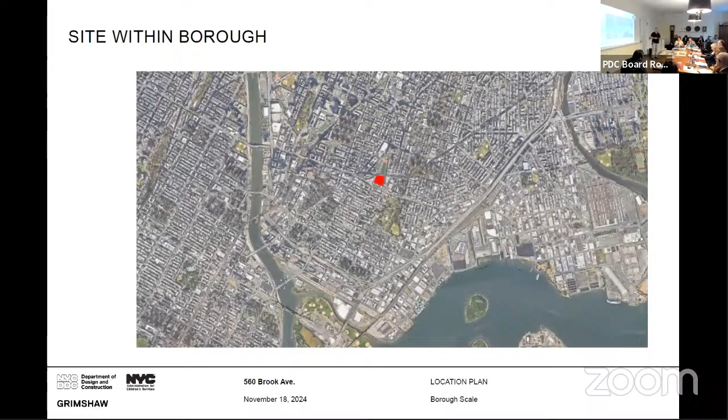I have my notes to try and skip through a lot of the slides so we get quickly to the changes since the last time we were here. You can see the site here. There will be a new entrance on Westchester, creating a construction zone in the current field with trailers, separate from the existing facility, which needs to operate 24/7 during all of the construction. The existing basketball court, shown in blue, will remain available to the youth during construction.

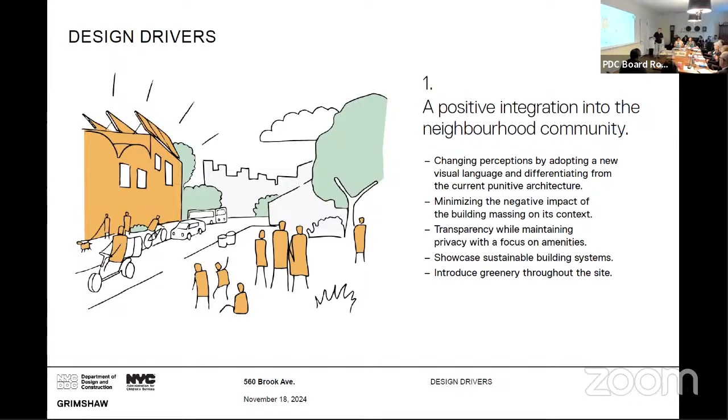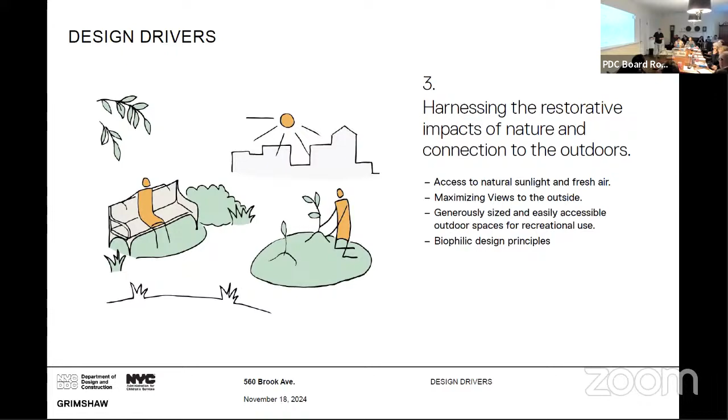The site is very land-challenged, so the program is a vertical program on a site that currently has 2 stories, and this will be a 5-story facility. You can see here, it's 4 interlinked buildings. Another feature of the land challenge is that the gaps between the buildings are quite narrow.

We have these breezeways that link the buildings so the youth, as they walk to school, get a taste of outdoors and the weather, and they're very excited about having that opportunity every day. To the south is the exercise pavilion, which has 3 stacked levels of basketball-court-size floors. The yellow is the education vocational building, and there are 2 housing halls that connect directly into their homerooms in the school building.

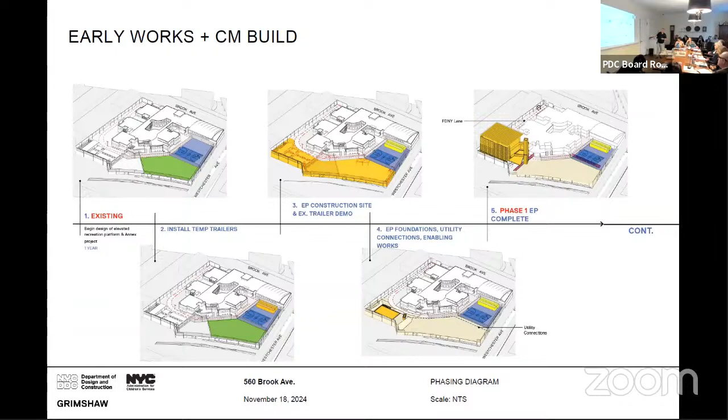In terms of phasing, we're building the exercise pavilion first, and we're hoping to start construction late this year or early next year. As I said, the existing outdoor basketball court remains available to the youth. Once the exercise pavilion is open with 3 basketball courts, the rest of the construction can continue. At the end, we create a natural turf playing field along Westchester Avenue.

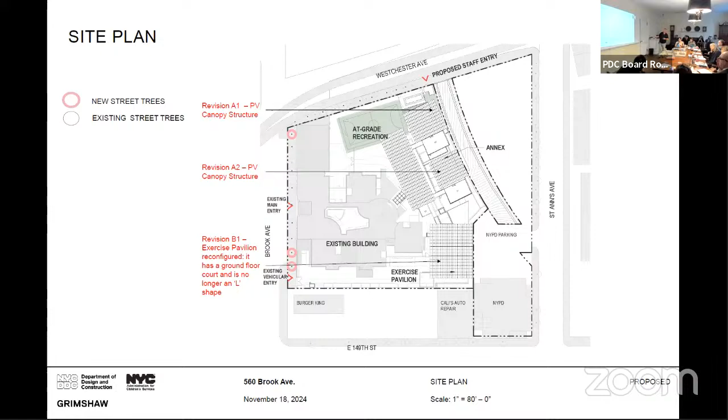We go to here, you'll see the latest roof plan. It shows the exercise pavilion with photovoltaics, the school building with photovoltaics, the 2 housing halls with photovoltaics over the mechanical, and open to the sky over the horticultural areas. Then the at-grade playing field and the new staff entrance on Westchester.

Ground floor: the staff entrance and brand new facilities, lounge and security facilities, locker rooms. They go through security. In red is the dining - there's a kitchen, back of house, and then 3 dining rooms with outdoor space, which you'll see later. And then in yellow, 2 trade workshops at ground level.

Level 2 is the health floor and also has the culinary arts facility. Then level 3, there are 3 levels that are quite similar - there's the school building and the 2 housing halls in blue, connected with breezeways. At level 3, we also connect to the second stacked level of the basketball facility in the sports pavilion.

Level 4, again school and 2 housing. Level 5, the school. And again we connect to the top floor, the roof level of the exercise pavilion.

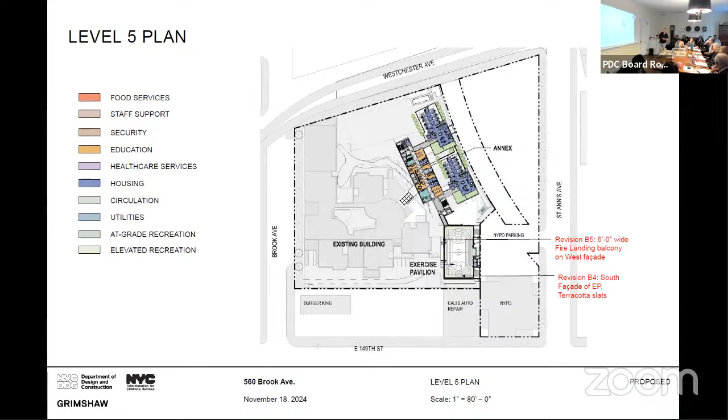I should mention I said the horticulture - 2 outdoor horticulture areas with a classroom, an indoor classroom as well.

And then if we skip past the elevations, you really see the building in the renderings.

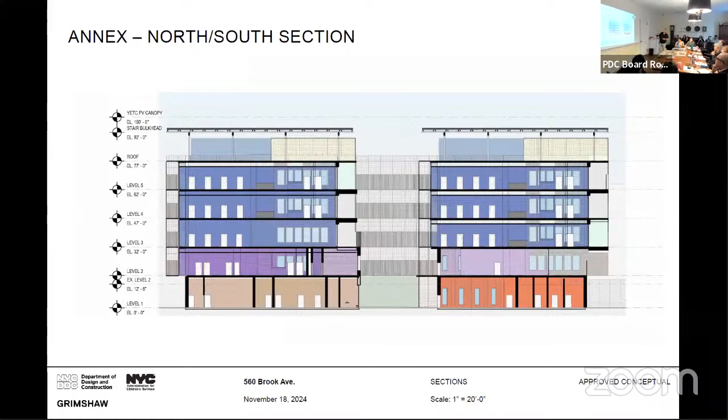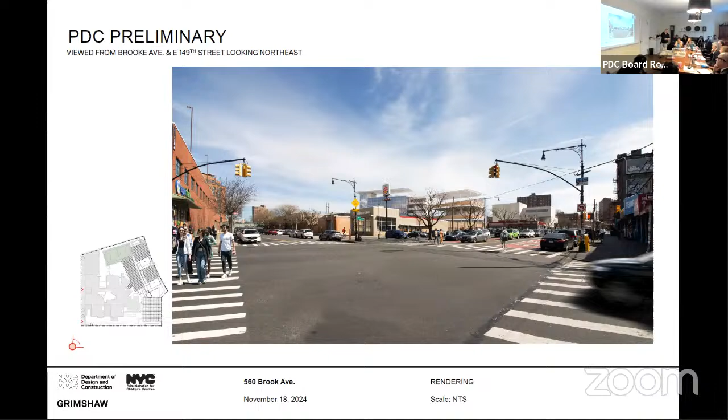So from the concept to preliminary, the view from Brook and 149th Street - the exercise pavilion has moved back in this view towards St. Anne's Avenue. You can see the lower floor is behind the perimeter wall, but then levels 2 and 3 are very open.

We're at around 50% of the energy needed in this facility will be produced on site. Another big change is we're now having terracotta slats instead of wood, so non-combustible. These allow the youth to have a regular window they can see out, and the slats allow visibility up to the sky but not down to the sidewalk, which is not allowed by law, and also for their privacy. The slats are about 10 feet in front of the bedroom window, so you'll see a rendering of that in a minute. Now I'm going to hand off to my colleague.

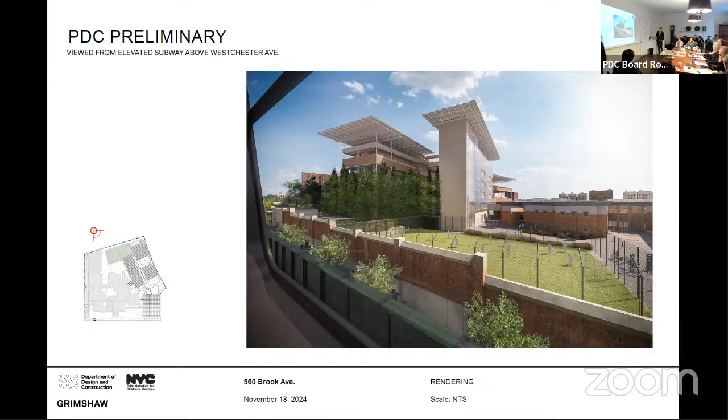I'll skip through these a little bit, but this is the basic lighting plan for the exterior, which you just saw in the image prior. Then this is the lighting scheme for the phase one exercise pavilion, and this is the outdoor basketball courts.

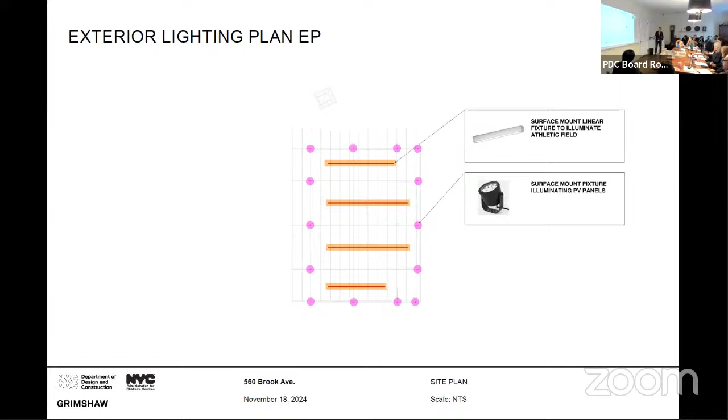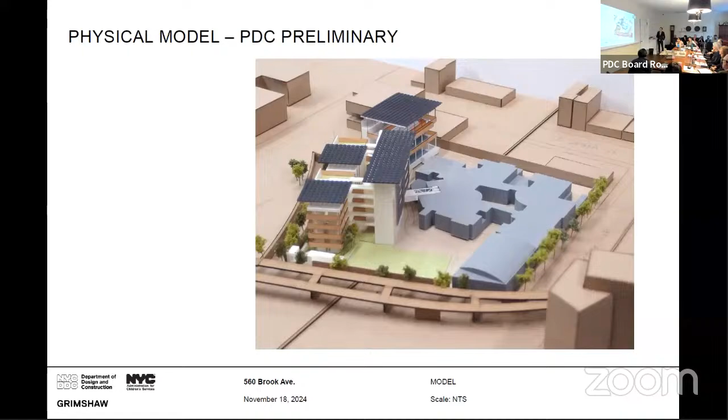So here's our model presented at the concept phase. Again, the biggest change is in the massing with the reconfiguration of this building, the exercise pavilion. You can see that it's now been shifted or rotated and moved due to some challenges with zoning, but we've made it more compact while still providing the same amount of outdoor activity space for the youth.

So the major changes on the materials are that we are moving from a wood slatted screen to terracotta baguettes. Part of the reason was for code requirements of flame spread, but also durability and maintenance concerns that the terracotta will help address.

Otherwise, as we mentioned, the building integrated photovoltaics is an item we're still looking at. This is showing an example of maybe adding a bluer or cooler tone to try to bring some of the cool tones from the adjacent precinct building. There will be metal mesh screens incorporated as part of this, as well as the PV canopy and the porcelain facade. I'm going to pass it off to Elizabeth.

Thanks. Since our last presentation, we wanted to address the concerns about the planting in the interstitial spaces, whether or not there would be sufficient insolation, really the availability of natural light, how the turf area of this recreation field would be treated, and whether there was sufficient insolation for the area we were proposing as the meadow.

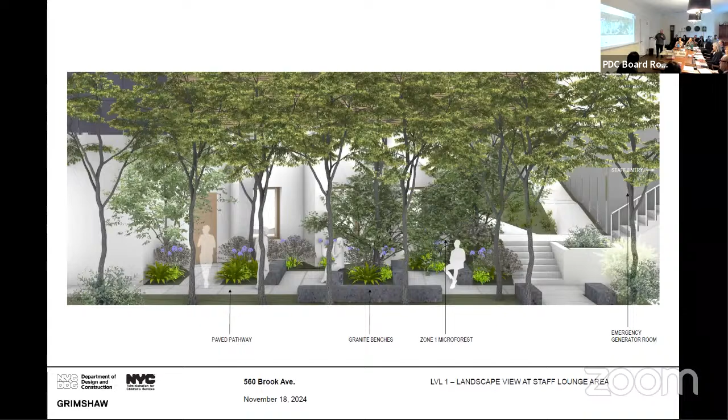Since this time, we have refined this somewhat. So where we have a deeply shaded condition, this is the suggestion of the quality of the space. This is on the eastern portion near the staff entry, the understory planting, and the staff breakout area, which the level of shade would suggest as an area of respite within the facility.

We're working on the palette for the areas of microforest, or what we're calling urban pocket foresting. We're really at this point relegating to the perimeter of the annex building because of the exposure to sunlight, and moving from trees to understory plants.

The selection includes consideration of the safety and sightlines through the site so that we're not encouraging elopement, which is one of the factors we found in other projects where if somebody has the opportunity to hide, they might. But in order to maintain the idea of diversity in the planting in these zones, even if they are quite narrow.

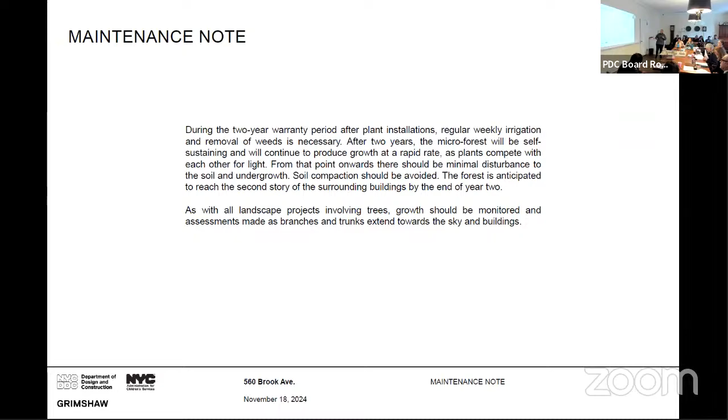As Juan and Stephen explained, the idea of porosity, visual access to the surrounding landscape, and auditory and olfactory connections are really important, plus the opportunity to incorporate education and information as part of the scheme of circulation is really important.

When we get to the roof and the terraces, the paving, the finished pattern, finished palette is pretty standard for exterior finishes, unit pavers, congruent with waterproofing and building envelope concerns. But the idea is to activate as many of the corridors as possible with the connection to nature.

And with that, examples, for instance, narrow but built-up planters with self-contained irrigation that can be manually controlled will be part of that scheme. Oh, am I going backwards? No.

Again, the idea of what those corridors could be like in terms of educational opportunities with interpretive signage, and opportunities for horticultural care.

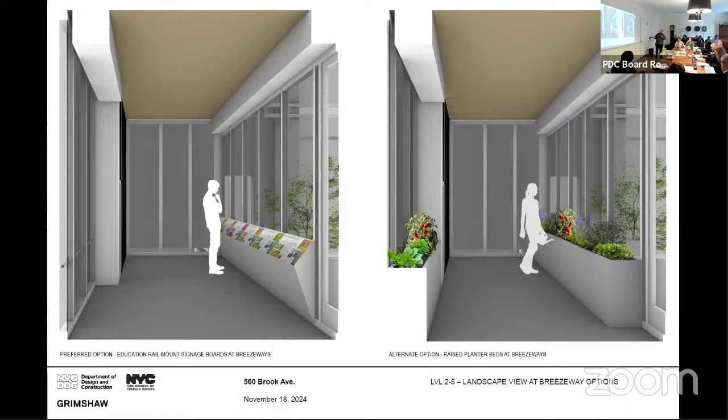In our meetings with the Hort Society, in their programming, they emphasized to us that the youth participants are really motivated and very interested in the horticultural, floricultural aspects of growing, and wanted to make sure that the programming and planning and design could accommodate those aspirations.

This has evolved since then, but we're looking at how we can efficiently lay out large planting beds that will accommodate the urban agriculture and floriculture programs in a meaningful manner, not give them short shrift in terms of scale, and the difference in how the planting palette could evolve from vegetable farming to medicinal and horticulture for ornamentation.

Again, with the interior program and the exterior program, there's the idea that anything planted at the level of the pavers would involve using compost socks. We've used this on other projects with some success, being able to limit the depth of the growing medium, which, as we know, is very granular, without having to go to a hard edge.

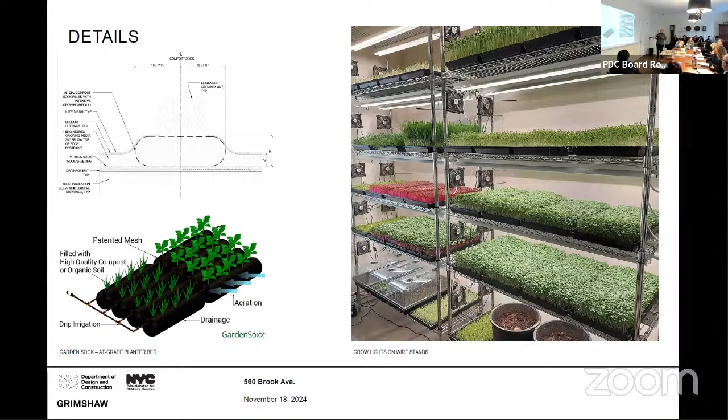And I believe this illustration is being updated, but we do have a mix of low and raised planters, in part also to ensure accessibility to all participants to the greatest extent possible.

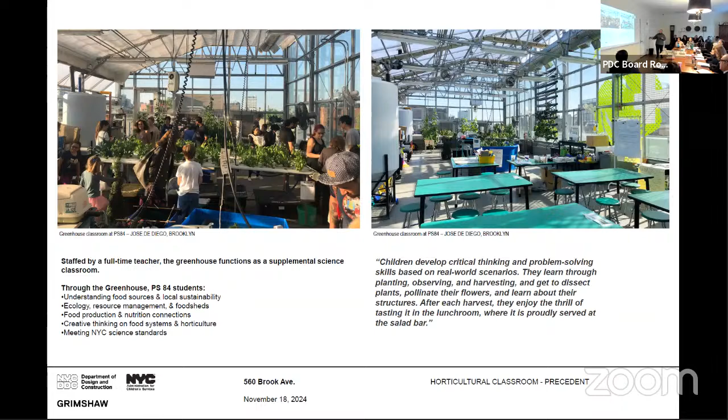Thank you so much. We will see if we have anybody signed up for... we have one more. Oh, sorry, I'll go ahead. You can try and use this one.

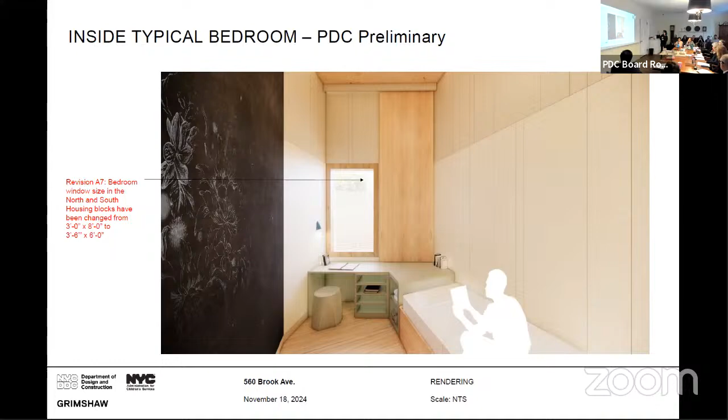Let's quickly look into the interior view update. As you see here, we create the environment for the housing unit to have a normative environment more similar to a college dormitory.

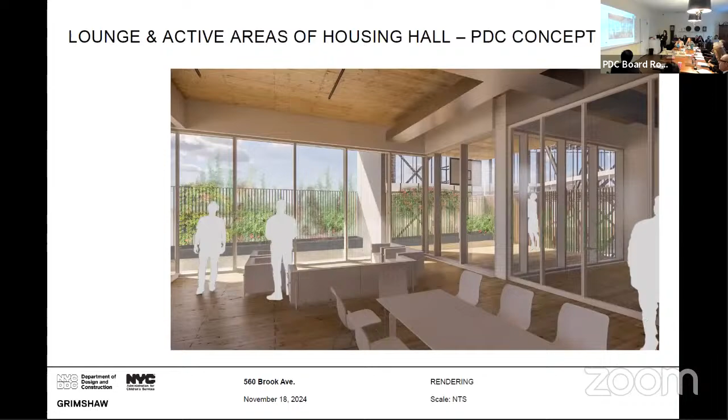We did a series of daylight studies to balance the window size and the outlook view extent, to optimize the design. This is the view from the housing lounge looking out.

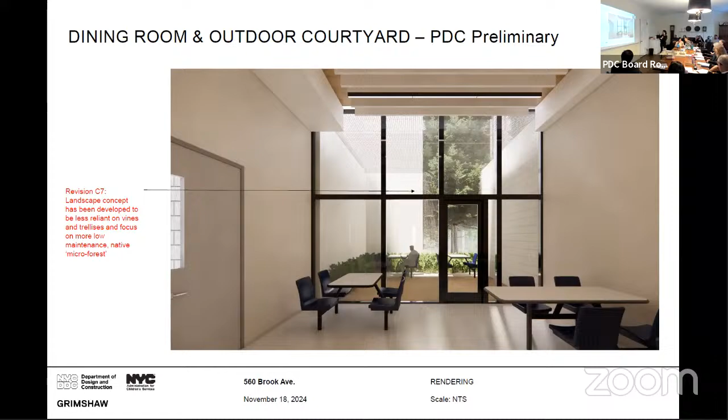We have two recreation areas for the youth for each housing unit, one active and one quiet space accessible for the youth. For the dining room, there are 3 new dining halls, each with an outdoor space plus a view to nature.

This is to see if the youth enjoy more daylight penetration. Once the annex and the outdoor sports field are built, if used, they would prefer more shade. ACS can install the remaining PV if needed.

Very quickly, we did a quick study of the view. On the model, perhaps — wondering if you can explain where this new view is. It seems like it's just a piece of it, so I was trying to understand the whole picture. This roof is the view looking at, in plan.

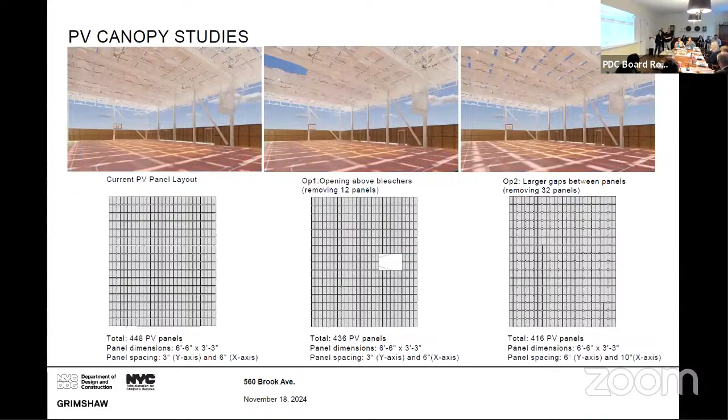So it's a PV that's hopefully being paid for by DCAS, true? So we're hoping DCAS comes to the rescue. Maybe we could hear from DCAS about the facade, the roof, and their contribution. I'm curious what you're contributing, or hopefully are contributing, which is exciting, by the way.

Right, so we are currently evaluating the proposal. We do have a mandate to install solar on public buildings, but we also have to evaluate the business side of it. As we look to install these structures, we want to maximize the amount of solar on the roof, but there are other considerations that are beneficial, not just to this facility but any facility, that we want to take into account. We haven't made a final decision yet, but typically we do fund these projects.

We have other projects with DDC that we fund. I just want to say we haven't finalized anything here yet, but we're working on it. We want to see where this goes, and then make a decision on the economics after.

So if the team doesn't have a confirmation from DCAS, will you be expecting that they plan two separate design paths based on whether they receive that support or not?

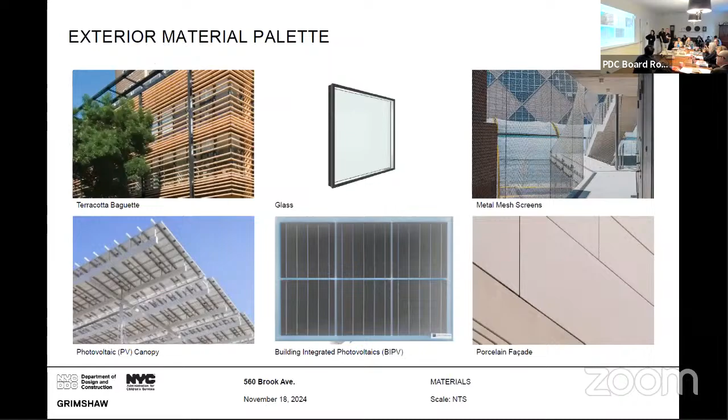Or if you go with the rendering glass, it's like that, right? Or if we go to blue, then you're matching it against those baguette elements. And if it's blue, it's more about the sky and reflecting the sky.

I'll leave it to you because this is a process. If you get the money, you're then going to keep working on it, and you'll be looking at these materials together with the new samples you get, and I'd love to see them. We'd love to, because it's very exciting to have DCAS as a partner on a big project like this.

We just want daylight. We're also interested in the benefits of the PVs. And I think Stephen mentioned we were taking some of the cues from the precinct next to us and the kind of coloring that they have. So that's where the blue came from, and the sky.

I guess that's it for me.

There were some images in the landscape architecture with interpretive signage, and I just thought more interactive or participatory approaches would be a lot more interesting than the more straightforward ones.

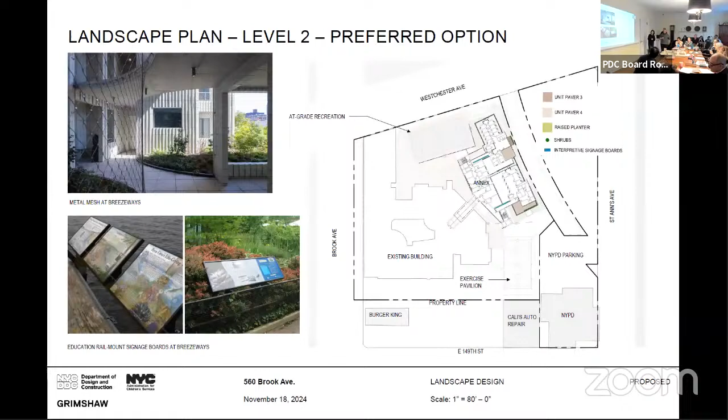There was another photo where there are planters next to the windows. I think this one on the right is a lot more interesting and probably more appealing to the population. So I see how the one on the left is easier to do, but...

When we were talking to ACS, there was also an interest in making the interpretive signage, which is not our specialty at this time, more interactive. So there was internal discussion as to whether that could be, I don't have the technical terms, so I'll say tablet driven, for instance, with touch screens.

Things that people could do to engage more with what they were seeing. I think that's potentially interesting, or it doesn't even have to be screen-based necessarily, maybe this block of text is separated and integrated with the planting in some way, or almost more like a nursery, with labels and things like that.

Elizabeth, can you speak a little bit about the width of the microforest areas? They're narrow, yeah. In some instances, they average about 10 to 12 feet.

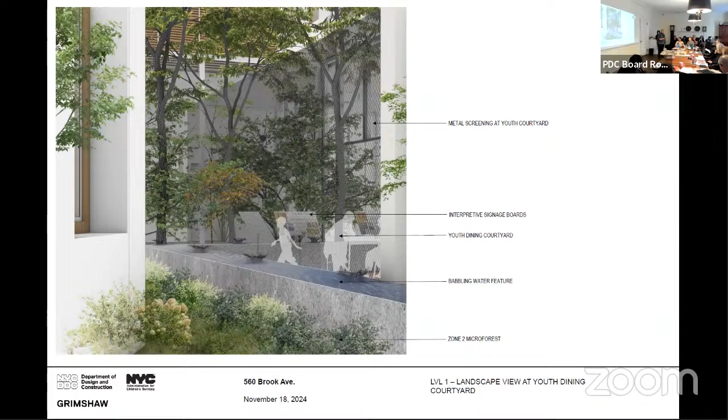Okay, and the plant palette—if the microforest palette, because it's a beautiful, very ambitious plant palette, it's too beautiful in my opinion. Yes, I kind of agree. I would be shocked and amazed if most of these things survive. So what's the plan when they don't?

Well, okay—I'm trying not to sound glib, that's why I'm hesitating. 4 years of care is really a larger commitment than is typical, for sure, first of all.

We understand that academically the original Miyawaki forest started in almost like a quarter acre to get that level of establishment. But I go back to my experience working on highways, where we're not calling them microforests, but we're planting as densely at all different levels to restore highway verges where New York State DOT has narrowed the landscape opportunity over time. We've seen those landscapes, when cared for, even in their narrowness, are really beautiful in those instances where they still exist. So I hate to say we're stepping out on faith, because this is a big commitment.

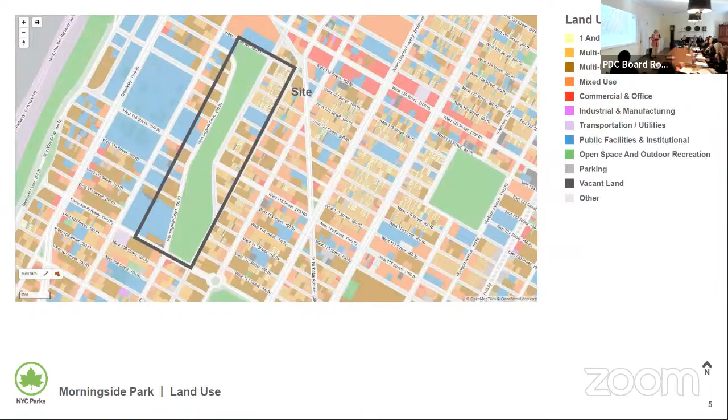Morningside Park is located in Upper Manhattan with a change of elevation of nearly 90 feet. We get heavy rains causing flooding on the eastern lower edge. We have dense residential use to the east, lower part of the park, and mainly institutional to the west. This 12-block long park serves a large population and area. This project addresses unsafe stairs and water runoff in three locations, A, B, and C. We have also added some work at the 116th Street Upper Plaza. I'll go through each of these areas individually.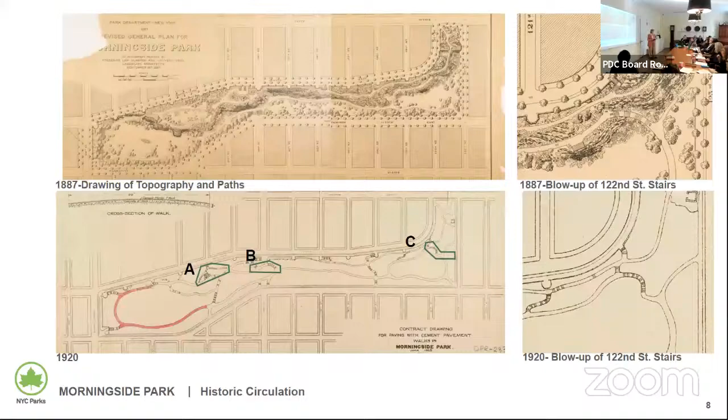These three sets of stairs each have their own story, although they all began as part of the Olmsted and Vaux 1887 design. Starting in the south, the southernmost stairs in this project are the gentle Y-shaped stairs at 114th Street. They're very dilapidated, with misaligned bluestone treads, asphalt landings in poor condition, and no handrails. The sides are lined with irregular carved boulders typical of Morningside Park and a rustic cheek wall. Our reconstruction will remove the existing treads and boulders, stockpile them, construct a new concrete foundation, then reset the boulders and existing bluestone treads and provide Landmarks gray concrete landings.

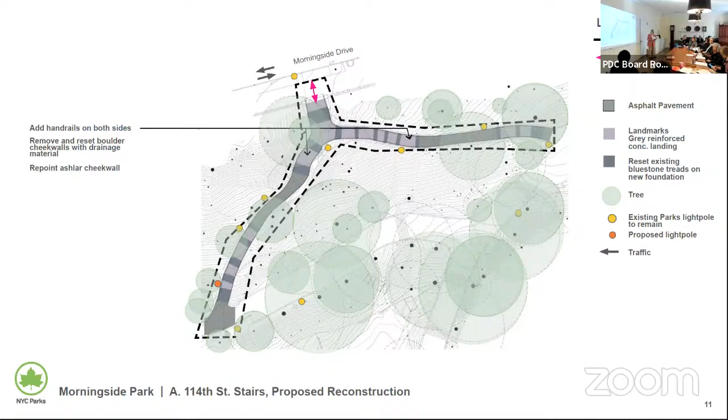If the treads aren't in good enough condition for reuse, we'll replace them with materials that match as closely as possible. We'll also add a park security light in this area, and we're adding handrails on both sides of these stairs.

The second set of stairs, the mid stairs at 116th Street, are very different in character. They're wider since they connect to the grand granite staircase.

The 116th Street Plaza, due to the constant flow of water from a protruding underground pipe in this area and slopes above, has treads that have been displaced from their foundation steps. Also, stormwater flows down onto the street instead of into the park's internal drainage system.

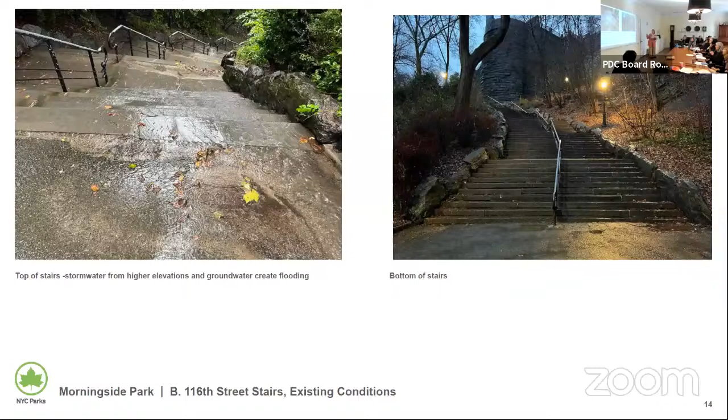You can see during a heavy storm we get a lot of water coming down these steps. We also have non-ADA compliant handrails and boulder cheek walls on the steps.

Our reconstruction will remove the existing treads and boulders from the existing concrete foundation, stockpile them, and then reset the boulders and bluestone treads. We'll pin them to the existing foundation, add drainage material, and provide landmarks gray concrete landings.

If the treads are not in good enough condition for reuse, we'll replace them. The Grand Steps and Plaza at 116th Street are well-traveled and used for public events, so security and lighting is a great concern here. We're adding several new park security lights in this area too.

We'll reset materials on the upper plaza area, and we'll be adding handrails on the center and sides of these steps.

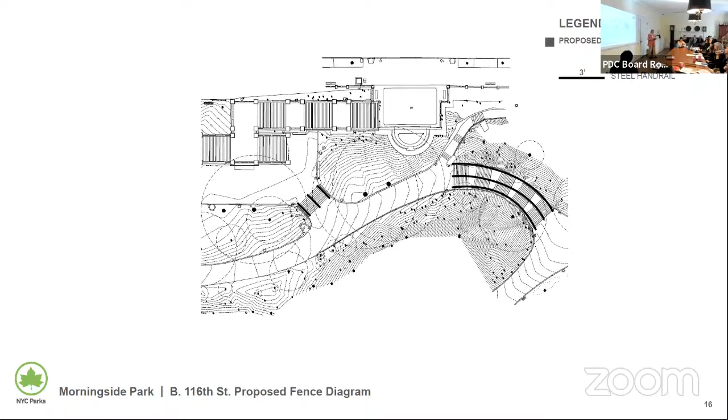The third set of steps at 122nd Street, again, are a completely different character. They were built later and have granite block cheek walls, and the treads are also very dilapidated.

As in 114th Street, we'll remove the existing treads, stockpile them, and construct a new concrete foundation, then reset the existing bluestone treads and provide landmarks gray concrete landings. If the treads aren't in good enough condition, we'll replace them.

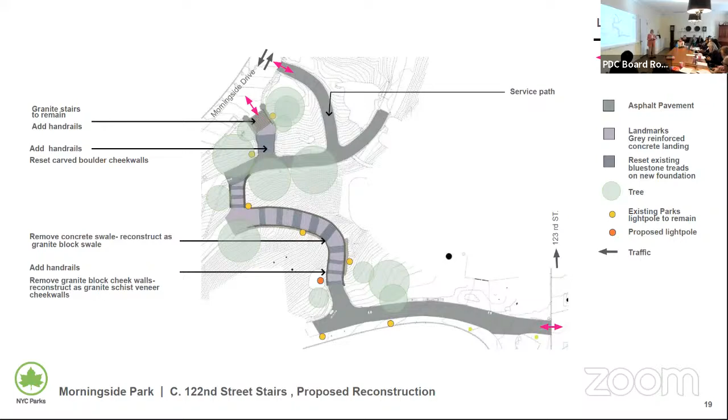We'll also reconstruct the cheek walls, and we'll be putting handrails on both sides of the steps.

The existing deteriorating cheek walls are built of granite block and have a step-down character. They have no coping to keep water out of the masonry joints. The historic intent of the early cheek walls and paths in Morningside Park was to place built structures and pathways so they're visually unobtrusive and recede into the natural landscape.

Our reconstructed cheek walls will follow the slope of the landscape too. We'll reconstruct the walls and stairs in the same footprint with the same historic granite blocks on a concrete core, using the existing joint pattern. We'll also use rustic granite coping to protect the masonry joints.

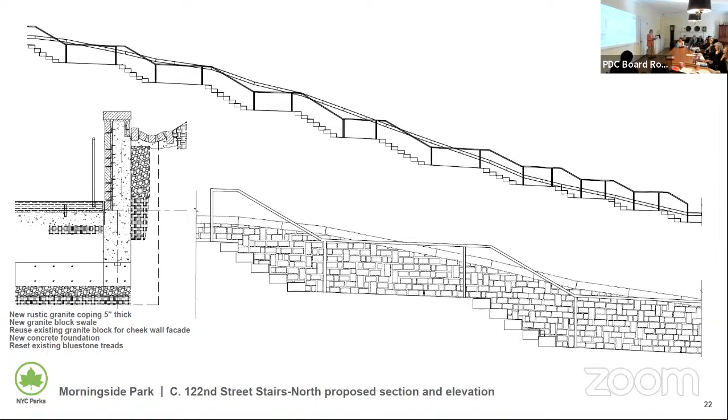Because of the existing slope and elevation, the north and south cheek walls will be very different. This is an elevation of the north side of the steps and the cheek wall, which must retain over 4 feet of soil in certain areas. And an elevation of the south side of the stairs, where the existing grade actually drops below the steps in a few places.

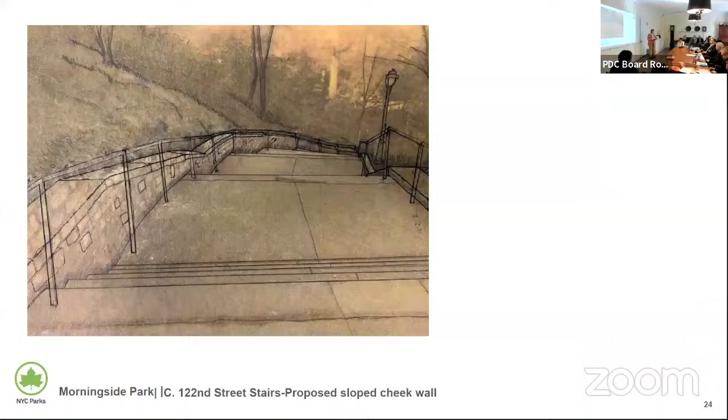This is what it would look like descending the stairs with handrails on both sides for safe accessibility, and this is what it would look like ascending the stairs.

These are the proposed site materials. We'll reconstruct the swales with granite block. The handrail is the same as the handrail previously approved for the stairs at 113th Street in Morningside Park.

We'll direct stormwater runoff into the park's internal drainage system using a variety of approaches, including new underground drain infrastructure and the new granite swale at 122nd Street shown earlier.

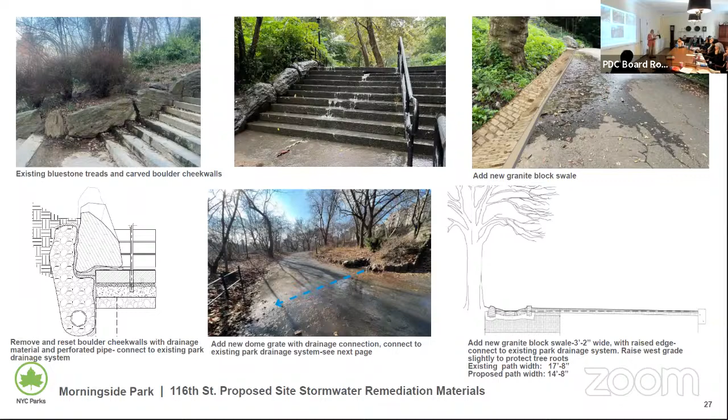Near the 116th Street mid stairs, the exposed pipe creates a bird bath area, which is a favorite place for dogs to drink and birds to bathe. We'll reconstruct the bird bath with a dome grate so it won't flood, and maintain its scenic character with mortared granite.

In 1939, the plaza at 116th Street and Morningside Drive looked like this; however, it looks like this now on the north side. We'll address the leaning pedestal and light pole, and we'll also reset the coping handrail and remove vegetation that is damaging the retaining wall coping at this location.

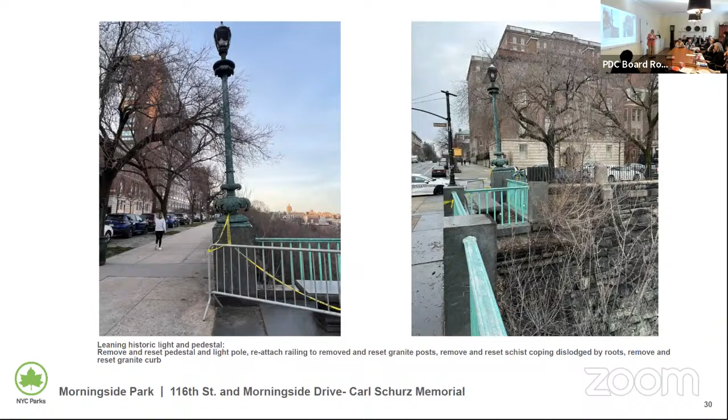So back to the big picture for your questions and comments. Thank you.

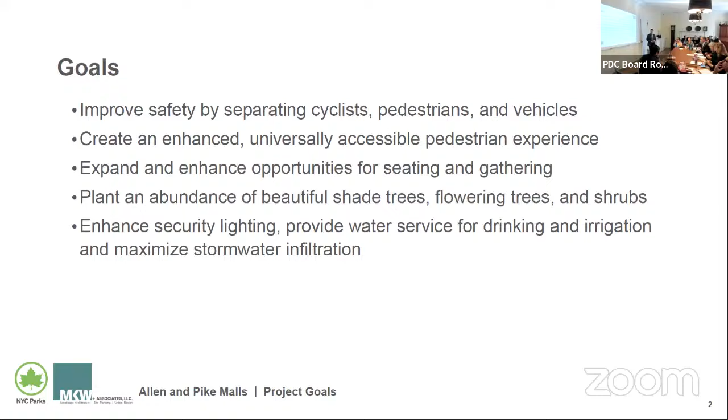We're focused a lot on improving safety, improving accessibility, making the malls more comfortable, and adding lots of new trees to add shade and comfort. The project location is in Manhattan, in the Lower East Side. You can see here, it's a very long, narrow, linear site in the center of the street.

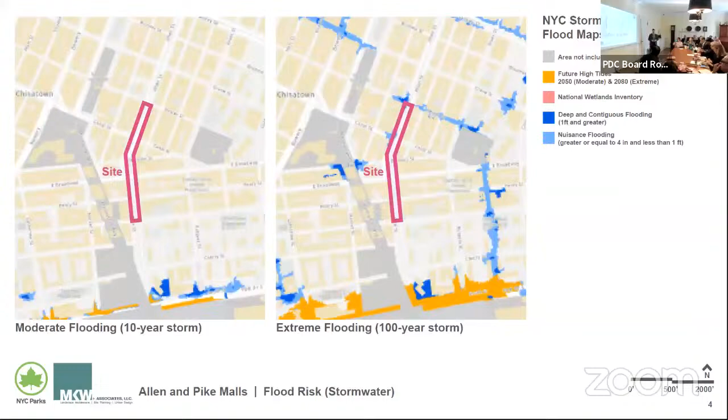In terms of flooding, during large rain events, we sometimes see some flooding on the west side of the street in these corners. We will be addressing that through increasing pervious surface and drain cleaning, and improving and reconstructing some of the catch basins. Surrounding land use, it's a very mixed use neighborhood. We've got some parks and some public facilities in the area.

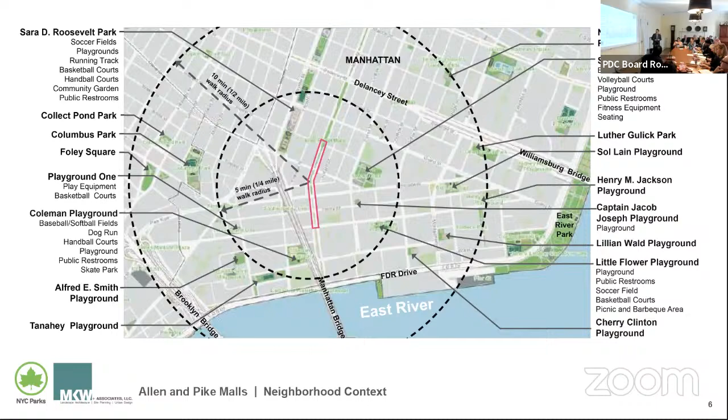Neighborhood context, so we have many parks. Our park in particular is a long connector open space that connects malls to the north and to the south down to the waterfront.

Getting into existing conditions, we're going to look at the site in thirds. You can see here on the key plan this pink area is the project that we're working on now, which is phase 2. Phase 1, highlighted in orange, was constructed about a decade ago.

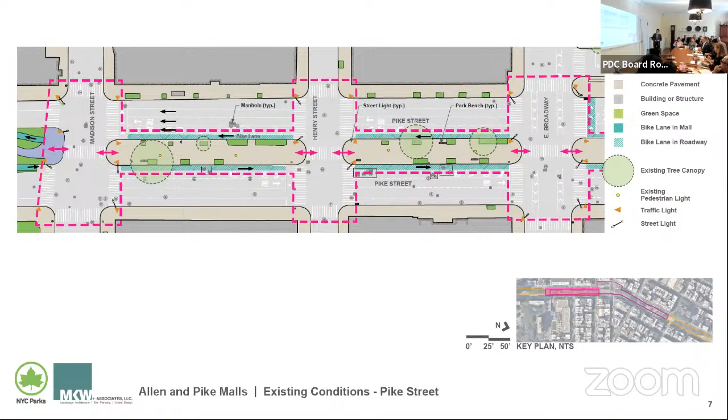This first slide is looking from Madison to East Broadway. We're looking at lots of paved areas, bike lanes that are in the street, and a patchy canopy. We've got some mature canopy trees here, some areas where there's no canopy at all.

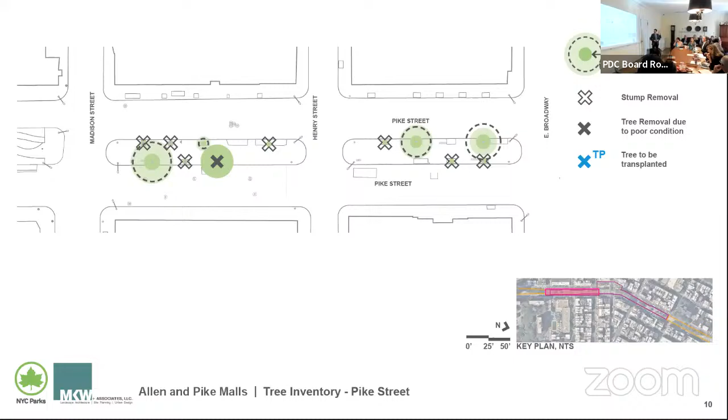Tree inventory: we're removing many stumps and a couple conditional removal trees. There's some areas where we're going to be transplanting, and otherwise we're going to be protecting and supporting all of the existing trees.

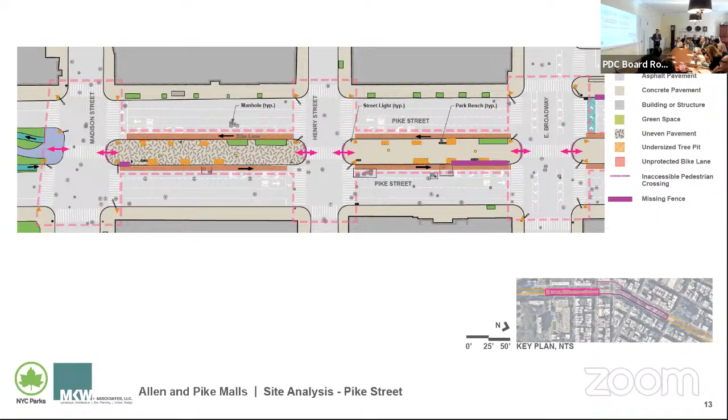Site analysis, some key points here: uneven pavement and inaccessible transitions between the malls. We have lots of undersized tree pits and a bit of a patchwork of fencing that we plan to address on our project. Looking at some site photos.

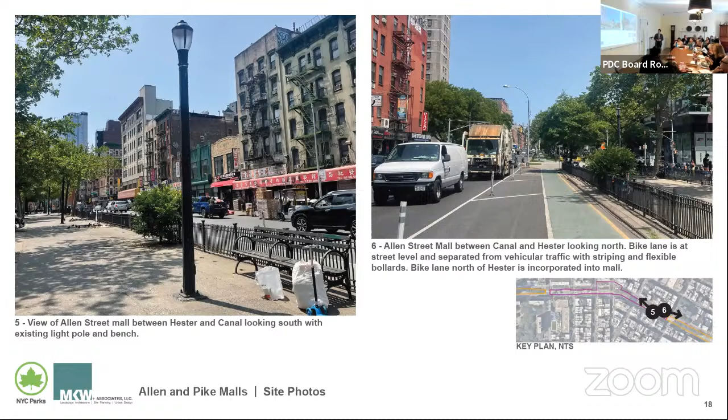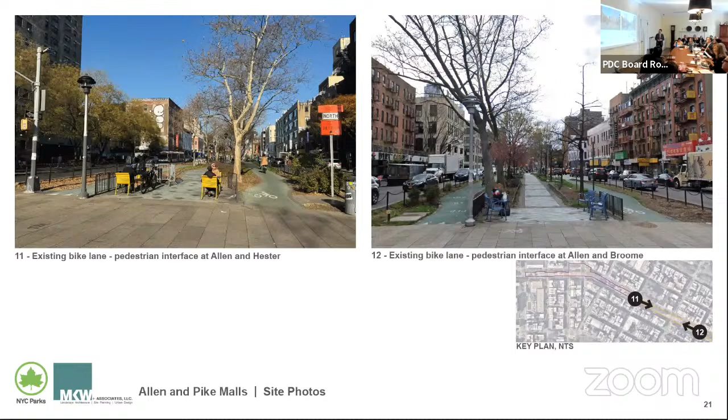And then looking to bike lane transitions, these are just some photos of bike lanes in the phase 1 project that has already been constructed. Here you can see where the bike lanes intersect with pedestrian areas. They do a bit of this jog that's for traffic calming.

We met with the community several times to hear about their goals and priorities for the project. We had a community input meeting, met with the community board a few times, and also spoke with volunteer gardeners who maintain some of the gardens in phase 1 to the north of our site.

Now showing how our site fits into the greater city bike network. Our site is here in orange. So we know that we need to connect to various bike lanes.

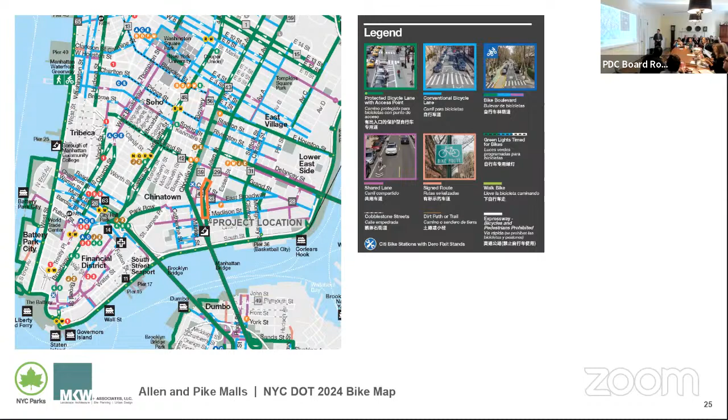Looking at circulation context, the pink is our site, orange is phase 1 to the south and to the north. What you'll see here is throughout, there's pedestrian walkways in the center. And we've got a mixture of bike lane types, going from phase 1, where they're all protected in the solid line, and now in phase 2, the existing condition, where they're not protected.

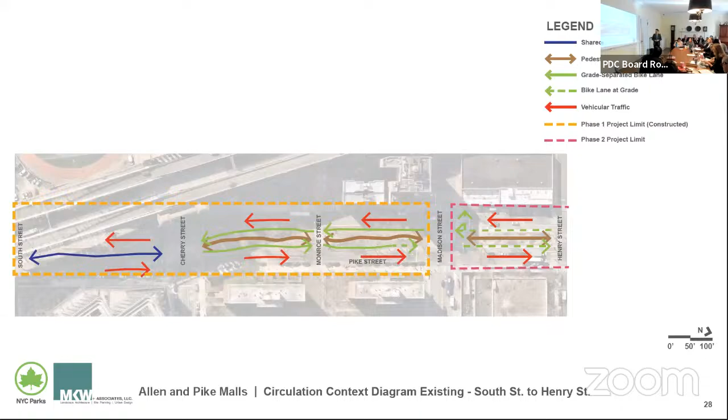Our proposed plan is to make all of the bike lanes protected. Here you can see that in a little bit more detail, where they're protected in phase 1 versus where they're currently not protected in phase 2, and how we plan to address that. Again, in phase 1 to the north.

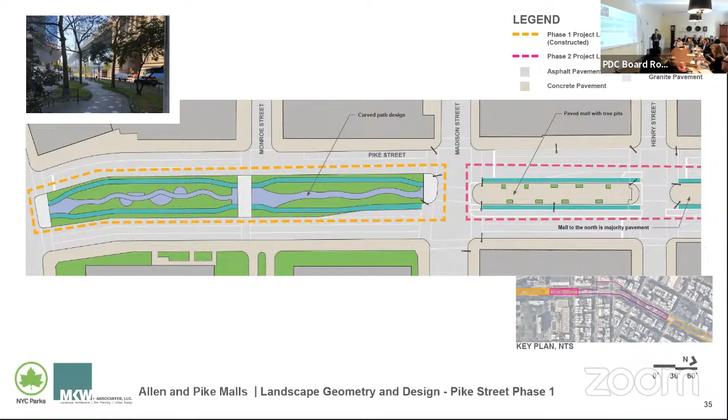Looking at the landscape geometry, we know that the walkway should relate between phase 2 and phase 1. In phase 1, we've got this curvilinear walkway to the south, and then to the north, it's more of an angled geometry. So we feel it's important to connect to those two geometries and bridge them in our project.

Now looking at design, from Madison Street up to East Broadway. You can see here on the key plan, we've got this curvilinear central walkway. The Henry Street intersection, we are proposing pedestrianizing, and we've studied that with DOT. We have long continuous planting beds with many shade trees and ornamental trees, accommodating the existing trees.

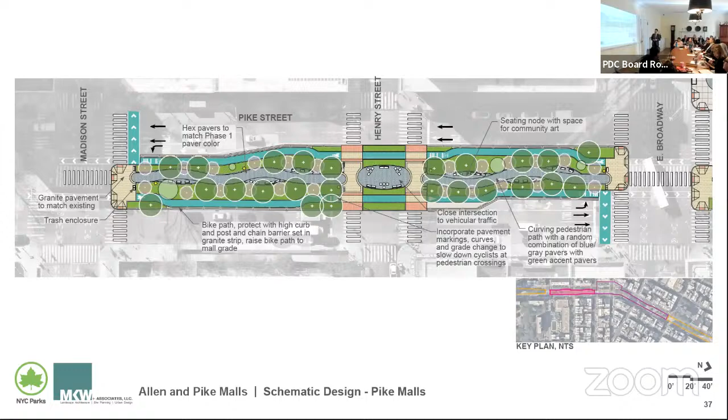Here you can see a little bit more closely furnishing nodes for seating that we've carved out. You can also see the comparison in the dashed red line, that's the existing curbs, so you can see how much more of the street we're giving to pedestrians and cyclists. This is all based on recommendations from DOT, and it reflects a lot of their striping out there now, but making it more of a paved, hardcore paved, protected situation.

Looking at the Henry Street pedestrianization more closely, we know that crossings between the bike lanes and pedestrians is very important. So we're using tactile surface and these kind of curves in the bike lanes to really create calming and notice for people when they're crossing those two different intersections.

We've got a number of furnishings that we've laid out. We're still studying the exact layout of these furnishings. I know there was a question about the bike racks, so we're going to study this layout and make sure that there's no conflicts between pedestrians and cyclists. We also have these kind of semicircle welcome mats, as we're calling them, to welcome people into the space.

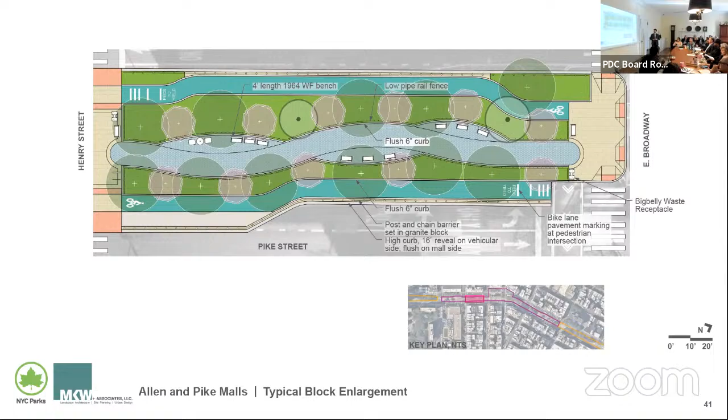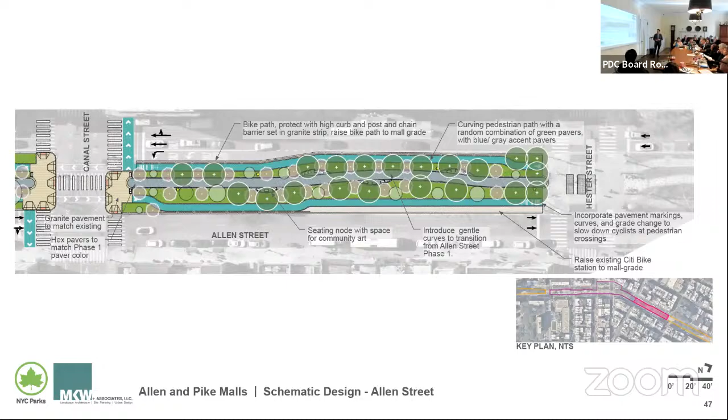Jumping to the north here between Canal and Hester, there's a very gentle walkway connecting to that angled design from phase 1. Here you can see how we've bumped it out. Looking at planting, we're using largely native plants throughout. All of these swaths will be single species swaths, and we're looking at seasonal interest and durability. We also know this is a rat mitigation zone, so we've kept that in mind.

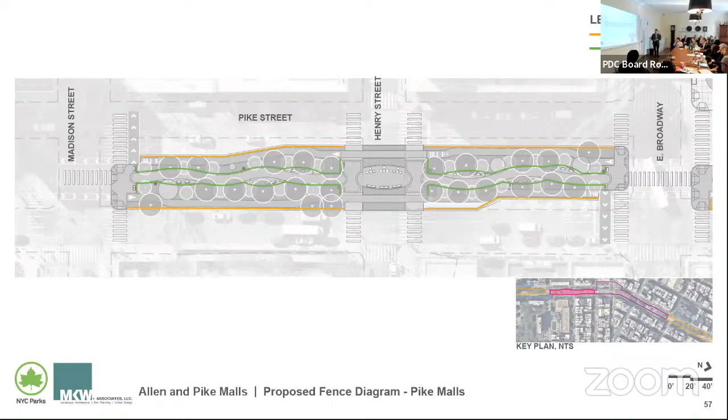Fencing—there's a mix of fences. We plan to use low pipe rail to delineate pedestrian areas from garden beds, and post and chain fencing to protect the bike lanes.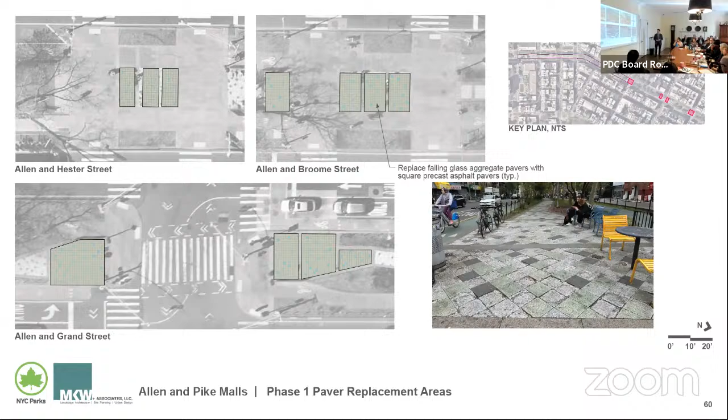We're also planning to replace some pavers in phase 1 areas. These are areas where the pavers have failed, and we will replace them with a different style paver that will be more durable, but in similar colors to connect. Here you can see the different furnishings we're using. And then for sustainability, it's a lot of pavement right now, and we plan to make it much more pervious.

All right, that's what we have for you. Thank you.

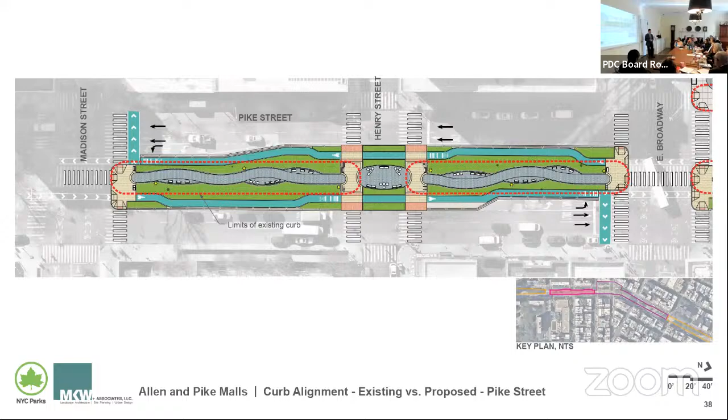And then in the north section, again we have lots of existing trees we're trying to work around, and we're also trying to transition into a more angled design up here. So we do these broad curves to try to make it relate, so that if you're walking from the north section all the way down to South Street, it feels like a continuous experience and a continuous thought.

I think overall it reads very random. When you flip through the slides and look for your existing trees, I find areas that actually don't seem to have a lot of existing trees and could potentially allow for a more balanced layout of these benches. So I would ask you to look at it more carefully, and maybe when you come back, do a plan that shows your tree protection zone against the bench nooks and against the pavements, so we can fully understand it. Because here you do have a lot, but on some of the previous slides, I don't see that many trees.

I would like to find opportunities to calibrate this a little bit more. It doesn't feel like there's a lot of calibration. Yes, we need to tie to the rest of the mall, but the rest of the mall was built more than 10 years ago. So with new materials, new planting, and the site expansion, I don't see that there's that much need for a relationship, as opposed to making sure this experience is great for the neighborhood. Chinatown, a lot of people use the outdoors. What are we thinking happens in these sitting nooks, and how are we providing opportunities for different types of social moments?

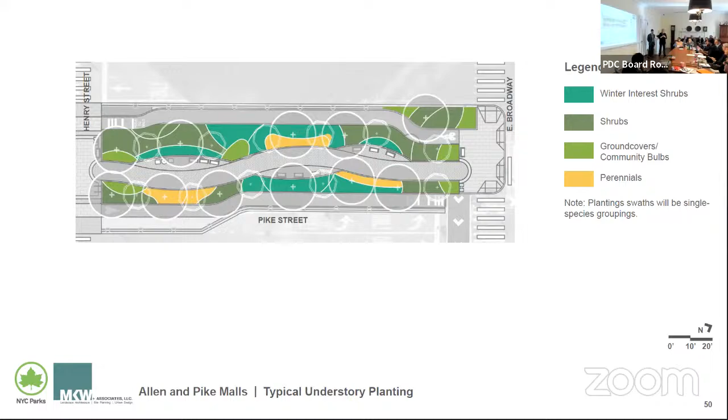Okay, I want to say I really appreciate the greening of this particular project in this area. But the thing I have most question about is where the bikes intersect with pedestrians, because there's obviously a big problem with bigger vehicles hitting littler vehicles. I've had so many friends incapacitated by bicycles that I'm really concerned about the areas with crosswalks. I think it's very effective where you have the jog just before the divot, so they have to slow down before they hit. Where it doesn't do that, I'm concerned people will be hit by bikes, kids, people who just aren't really anticipating that they're going to be in traffic. And the bike traffic is serious traffic going 25 miles an hour.

So, DOT, we've been working with DOT and we will continue to do that, state of the art safety. And Commissioner, I really appreciate it. I think one of the things that we benefit from here is we have 10 years worth of data on how this has performed so far in the previous phases, and it's proven very successful. We haven't had any accidents on the earlier phases of the mall. The one that did happen was actually in the street, and it was with a moped, not on the mall. So from a data perspective, we're excited about that.

At the same time, DOT is still pushing on new standards for especially these kinds of spaces where bikes and peds are interacting at crosswalks. We'll be coming, hopefully in the coming months, with some updated standards, especially around delineation for those who have low vision or no vision. This is something we're really keyed into, and we'll continue to work with the Parks Department on this project and a number of others that you'll be seeing. But I appreciate the concern, for sure.

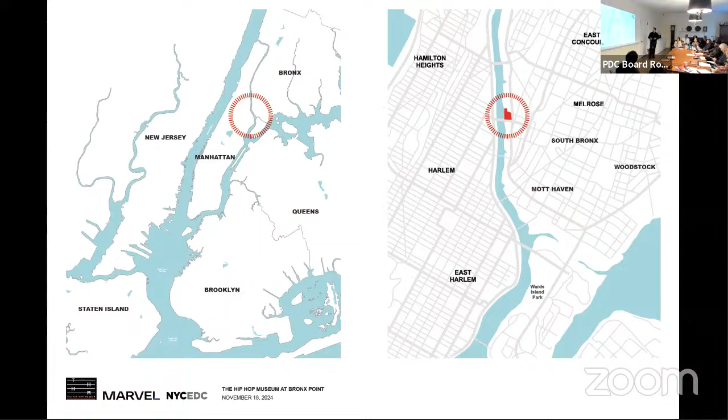And how hip hop came about in the streets of the Bronx. So you've seen maybe in the past Bronx Point. The project, the paver program and the museum, is located at Bronx Point, which is at 149th Street and the 145th Street Bridge along the Harlem River.

The museum will be at the second level, the full second level of the building. This project is completed. Some of the images here are construction, but the project is actually finalized and everything is installed. The majority of the museum is on the second level with an entrance right there at the ground floor and a little bit of a presence there on the ground.

So we're looking at two areas for this paver program. The first one is the terrace itself that I showed before. And the second one is these, what we're calling the apron.

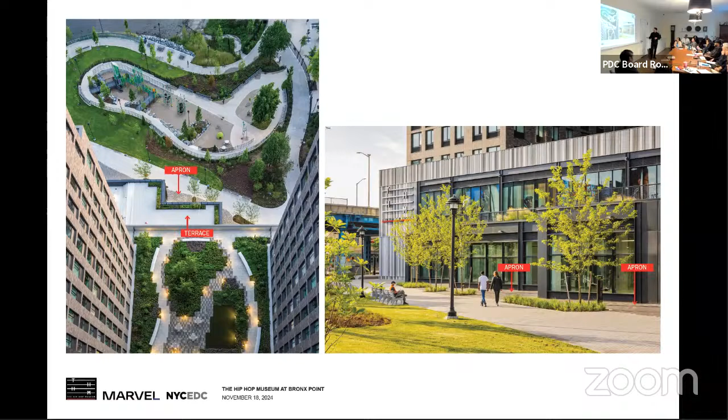This was part of the original design of the park and the placement of the building. The building sits in a park, and the geometry of the park and the esplanade is this curvilinear winding path that opens up from water to the land. The building has this darker area of pavers at the base that goes all the way around, and then the terrace is a second floor terrace.

These are pedestal pavers. Let me go back. These are the apron, which you see here, a little bit of it. These are 6 by 12 pavers, and the terrace pavers are 12 by 24 pavers on pedestal. So a little close up of the area.

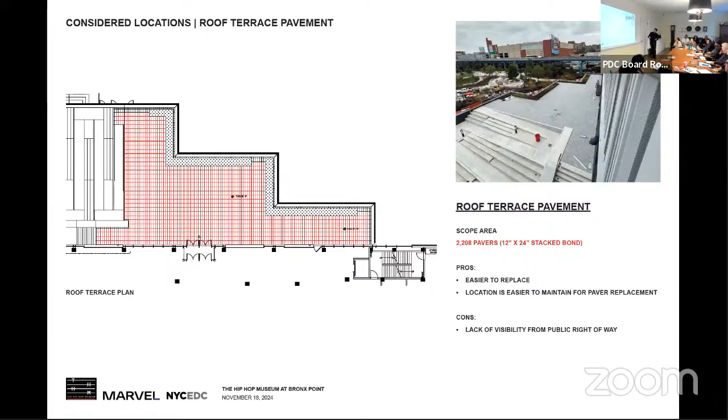Terrace, second level, around 2,000 pavers available, but we're not using them all. Same with the apron area, which goes all the way around the building. This geometry that you see here already exists on site, and it's a darker paver mix. We're planning on using that as the area where this paver program can go at the ground level.

The inspiration for the design of the pavers, or the program at the terrace, is the idea of the boombox, which is an important symbol of hip hop culture. We thought it would also lend itself to a very graphic image or quality that represented the museum, the institution, and what hip hop represents in the neighborhood.

We explored, as you saw through multiple presentations, two scales of a boombox. One was creating a simplified graphic of a boombox on the paver itself, and the other was to do a super graphic of a boombox on the terrace level. Based on your input, we've simplified the paver itself, and we're going for the super graphic on the terrace level, without having the paver also have a boombox graphic.

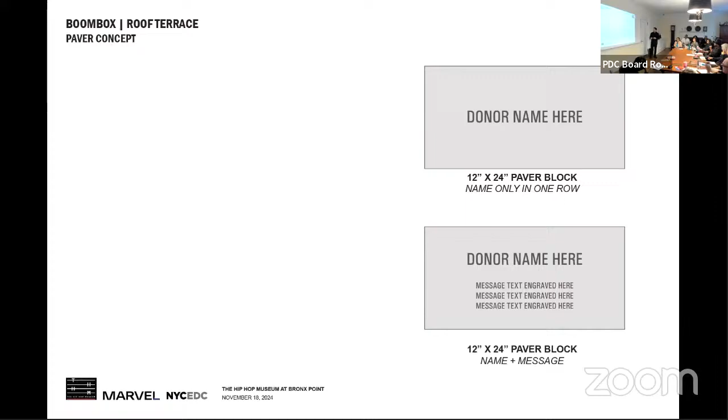So the pavers at the top, which are 12 by 24, will be simple. So the two options: either the donor wants to just put their name, or the donor wants to put their name and a small message attached, which will be reviewed and vetted by the museum before accepting. So that's what we had before.

This is what we have now. And then two tones of pavers to actually create the super graphic. We were using 3 before. We think we can achieve it with 2.

So the lighter paver is the paver that's already installed at the terrace, so that's the color as it exists. And then we're introducing this medium gray tone to create the contrast between the two pavers, creating the graphic of this boombox.

So again, boombox. This is the storefront of the museum, so museum goers will be in the interior of the space, and they will be looking out, and they'll be able to see the terrace and the graphic from some of the exhibition spaces and areas inside. So we're facing the boombox towards the museum.

We took a pass at simplifying some of the graphic design of the boombox itself internally, and the other ones are some musical notes that go with it. The total is 956 pavers, and it's just 2 tones of gray, but in this legend we're showing 3 tones, just so you know which ones are the ones we intend to use for the paver program.

So these will be the same color as that, but are part of the program. These are not part of the program, right? So only the darker pavers and the interior light pavers here will be part of the program, the paver program.

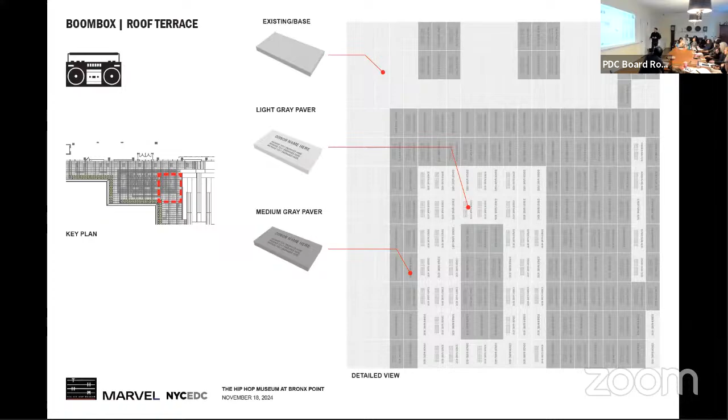Ground level, just quickly, there's still 3 tones of pavers, but these 3 tones already exist in the design. So when you look at it here, you have slightly 3 variations of that tone that are part of that field of pavers. So we are trying to use exactly the same pavers that we installed already.

There will be new ones that we'll buy and engrave, and we'll take one out and replace it. When we take that first batch of pavers out, we will store them and reuse them for the second batch of installation. So we'll take those to engrave and reinstall. We're going to be mindful about the reuse of the pavers.

And we are planning on starting closer to the entrance from this point out, towards the east, which is the exterior street out here. So it will come this way first, and then in a later phase, if they sell enough pavers, it will come around this way, installed in a little bit more of a randomized area.

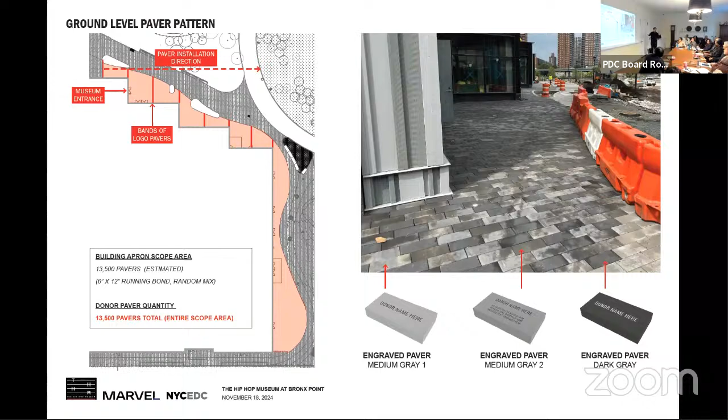We are not planning or expecting that we'll sell 100% of these pavers. So in the same way that this field of pavers is installed in a kind of random, pixelated way, we expect to install the pavers from here to there similarly. Let's say 50% of the pavers are sold in the first batch — you'll see 50% engraved there and the other 50% not.

So again, this is exactly what is there, except that you have the engraved version. In this example, we maximize — we show everything engraved, but expect some of these not to be engraved.

There's some limitations to fonts that we can use so that the engraving process actually works. This is a font that the engravers, which is done through sandblasting, recommend using. So that's what we're using. Very simple — we're going to control the spacing and the placement of the text, but keep it simple.

And the last thing I want to mention is that we are aiming to do the engraving through sandblasting, with a paint that goes into the engraving. This paint is called Lithichrome — there's a monument line of that paint used widely for painting engravings on monuments, like in cemeteries and paver programs like this one. It's a paint that's proven to last in open-space situations like this one.

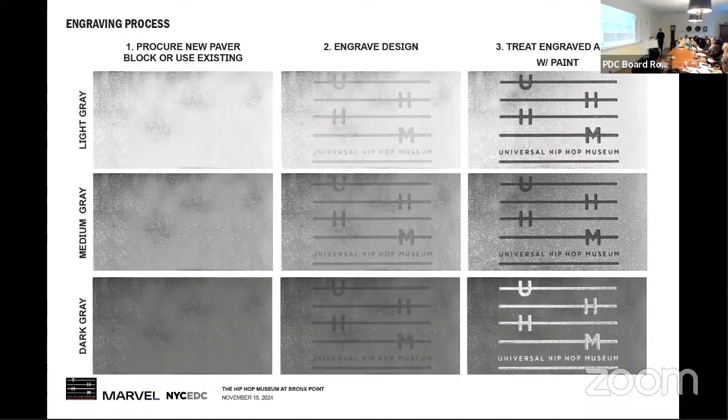So you'd be able to play it. I think that will be fun. Yes, ideally that will be fun.

Right, ideally. One of the things we would love some feedback on, because programmatically as we take the orders, is if there's a way to constrain what the names are relative to what the comment is, because that visual component is important. We want to make sure it looks really nice, so people are going, ooh, love this. Any input is welcome.

I think you could do a template of like, here's name only, name in one line, name in two lines, name in three lines, and then lay that out ahead of time to see how it looks.

So do you put the one-liners in specific places? Yeah, because unavoidably, maybe there's a potential that there's a name that's a little longer. Let's say we allow this to go to that 1 inch mark, but the name continues on a second line. That could happen here as well, but this will have to shift up a little bit.

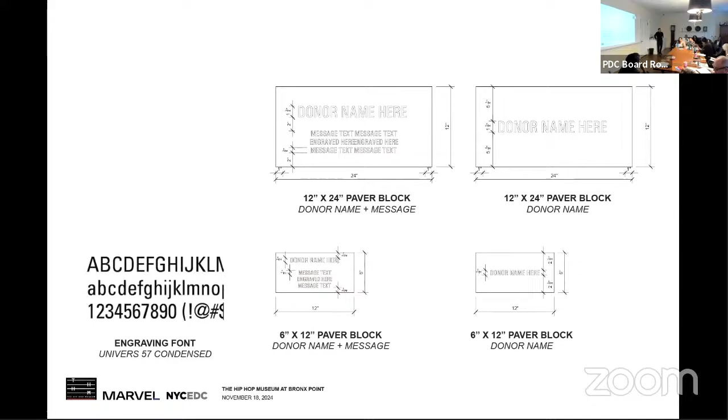I'm not sure what the other graphical thing should be, but I think you should play with it. To the degree that hip hop artists spend time working on their bars and try a hundred words until they get the right one, it could be language, which would be great, like that one quote you have.

But it also could be sound waves, it could be a number of things, like you said, on the low register. So there are a number of different ways to get to something that will give you even more space to market, which obviously hip hop is marketing with beats, and the aesthetics you want. But you've got to play a bit more. From the play, this feels like the second idea that came up, the musical notes, but not the best idea that came up.

I don't know what that thing is, and I wish I had some suggestions, except that I have to say, especially since the boombox cuts into where the music is, that's not working. I think there's a solution here. And the other thing is that for a lot of people, they will see this thing from above.